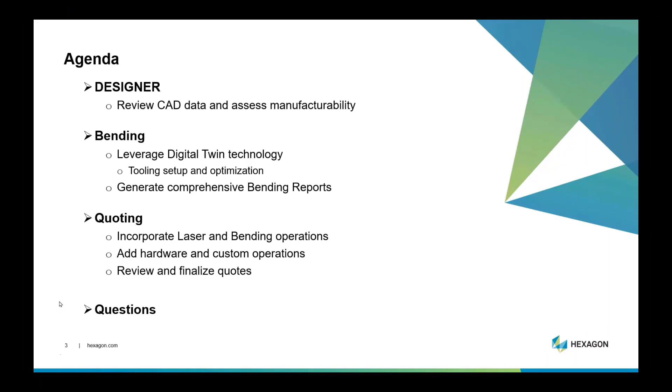And then last, we'll go through quoting. We'll add some operations such as laser, bending, hardware, or any custom operations. We'll review the quotes, and then we'll go through some questions. Okay, you guys ready for this? What I'll do is I'll turn off the camera now, and we can just go through and kind of see where we would start. So we would start with Designer, right?

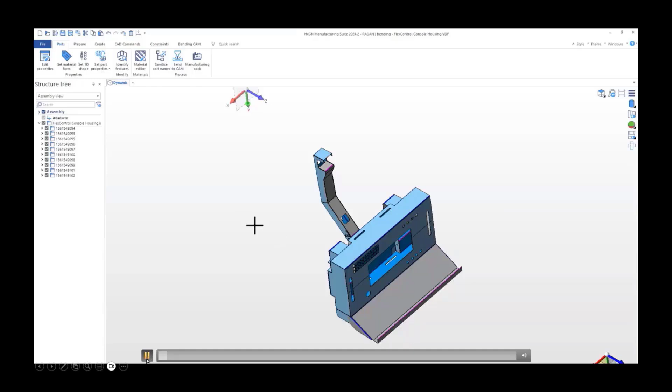Again, in Designer, we would verify. My first question is, we would import CAD data, right? So this CAD data can come from SolidWorks, Inventor, any 3D format. Okay, you can use SolidWorks or Inventor to look at CAD data, but in my case, I'm going to use Designer. I'm going to get my eyes on this CAD data, right? I'm questioning, are these parts manufacturable? So maybe I'll go through the assembly, look at the individual parts, kind of question if there's any issues like this part here, right out of the gates.

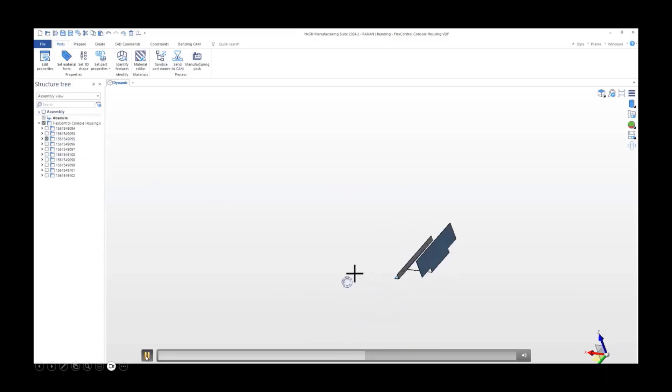That looks to be an interesting part, right? So can I manufacture this part? Maybe I'll circle back to that part later. And then I'll keep going through and just get my eyes on the CAD data. Technically, we can bring in the 3D model directly into the quoting module and start quoting, but personally, I want to get eyes on this first. So I go through the different parts. Some of these parts look fairly easy to manufacture, so no issues there.

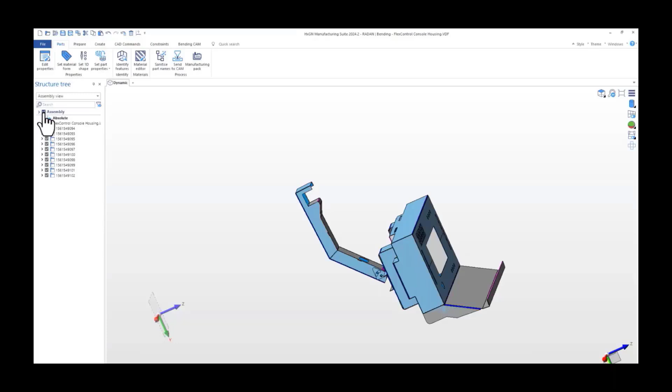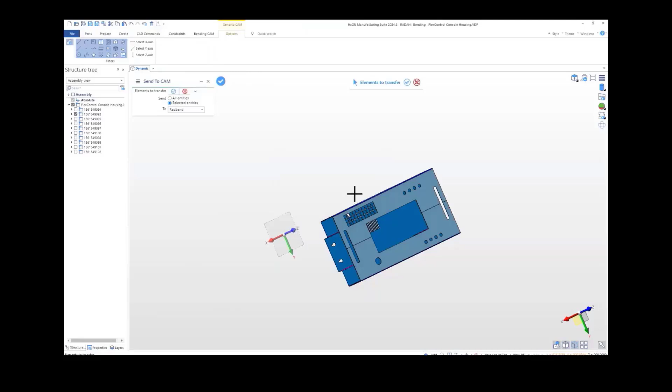Okay, so once I bring the CAD data in, I'm going to circle back to this part here, right? So once we bring in the CAD data, I want to question whether that part can be bent or not, right? One of those parts was in question, so I can come in here and isolate that part. And then I'd pass it over to Radbend, which is our digital twin for our specific machine, right? So we would have the ability to come in here and say, all right, how would we process this part? So the software would help you with a bend sequence, would help you with a flat pattern.

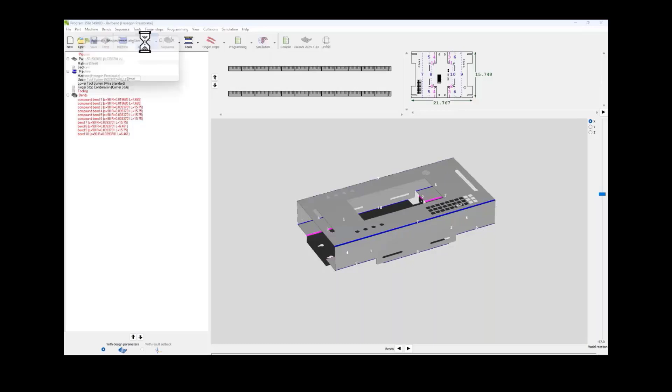You would then select your machine, your digital twin. You can have any machine regardless of the manufacturer. And then we would ask the software to scan through our tool library and determine whether we have the right tools for this part. It comes up with a tool setup. And then we can sequence through the bends, right? So we can verify, hey, am I going to have a collision or not? Do I have the right tooling? Do I have the right sequence, right?

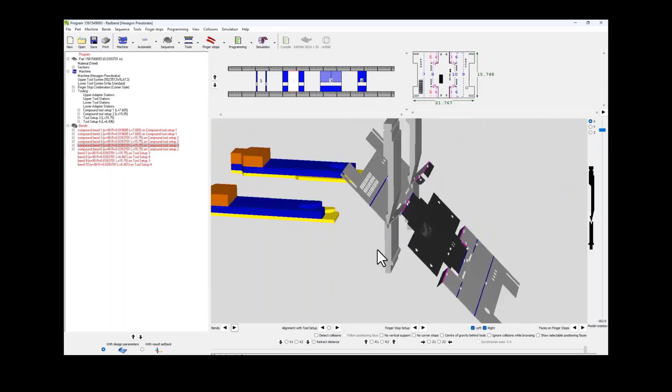Historically, traditionally, the quoter's going back to the shop floor and asking them. We eliminate that step here by using the digital twin and verifying that, hey, I can process this part.

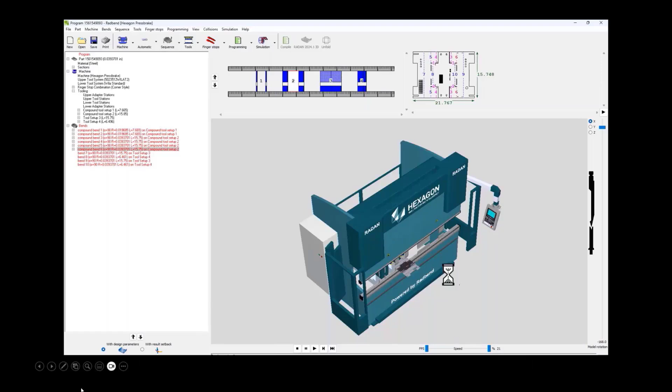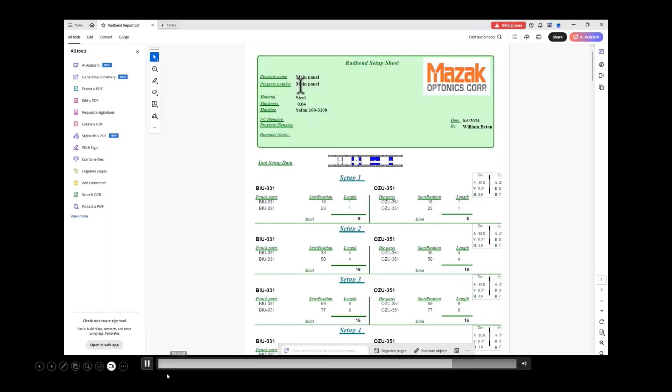I go through a full simulation process. It would allow me to see any collisions with the RAM, with the tooling, with the finger stop, any portion of the machine. I can go as far as sending code to the press brake and being able to program the machine offline, or just verifying that I have the right tooling so I can commit to quoting this. We can go out and send a setup report.

That setup report would contain the tools needed for the press brake for this specific part, segmentation, where to locate the tools, and then the bend sequence. So pretty straightforward there, right?

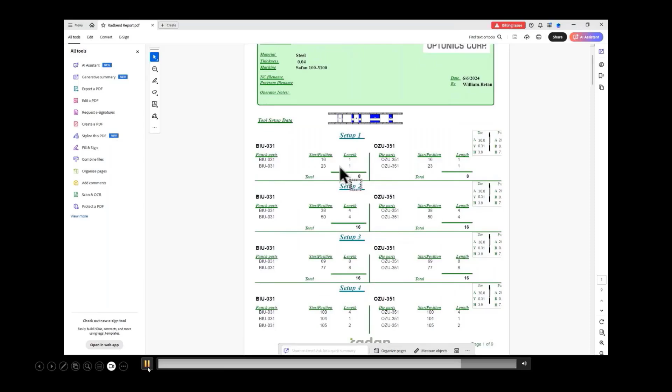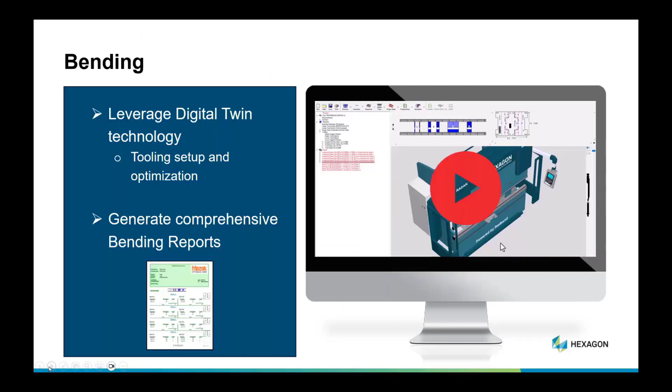Now that I've confirmed that I can process this part, I can go ahead and maybe at this point, commit and start quoting, right? I want to start my quotation.

So the next step here is, once I got eyes on it, I realize, hey, I can process this part. I can send all my parts over to the quoting module.

Now notice, Designer allows you to integrate all Radan products together, right? So Designer brings in, you can bring in your geometry into Designer, you can send it to bending, you can send it to quoting or nesting, whichever operation that you want to do. You can use your OEM CAD package like SolidWorks or Inventor, but in this case, like I said, I'm using Designer. It flows very simple and easy.

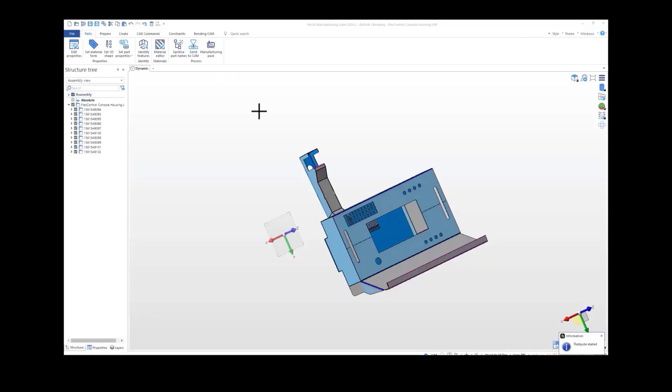So at this point, I'm going to say, hey, I'm ready to put a proposal together. So first question would be, do you want to start a new quotation, or do you want to add this to a previous quote? Who is this quote for?

All right. And then what we would do here is we'd bring in the geometry right at the top, right? You got the customer, the markup for the customer, total sales price. When we calculate, we can add attachments, okay?

We can import 2D CAD, 3D models, DXF, DWGs. We can do a manual part, okay? We can also do purchase components such as hardware, which we'll do some of that in this quotation here. We'll do tubes and bars, any safe parts, common parts that we typically quote.

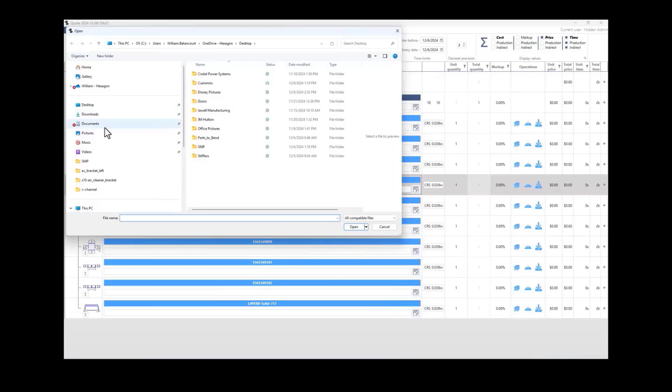Okay, so it'll bring in all the parts to that assembly, unfold them. We can also potentially change the thumbnail of the assembly, right? So a nice image of the assembly, so that when we prepare a quote document, we can go ahead and show what that full assembly looks like.

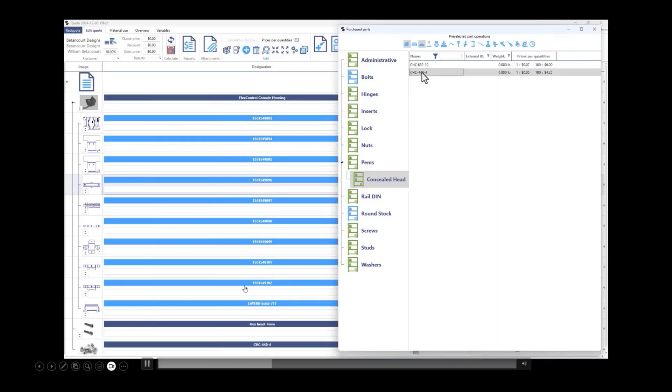So here we have the assembly, all the individual parts. What I'll do next is I'll add some hardware, okay? So maybe some PEM nuts, some nuts and bolts.

If the assembly had the hardware in the CAD data, we wouldn't have to do this, but in this case, it wasn't there, right? So very easily, we can come in here, add some purchase components, add some operations, such as riveting or additional assembly time to that piece of hardware.

We can go through and answer some of these questions. So notice on your right-hand side, you got material, laser, and bending operation. You can customize the amount of operations that are in here, right?

Fully customizable operations. In this case, if you look here, you'll see that for the assembly, I have welding, painting, spot welding, riveting. Out of the box, you will get a group of operations, but you can add custom operations and you can customize the out-of-box operations.

For instance, here, we'll go ahead and add some welding. Here's the welding operation. I wish I could stop this a little bit because there's so much good information here. So you can select which type of welding you want to do.

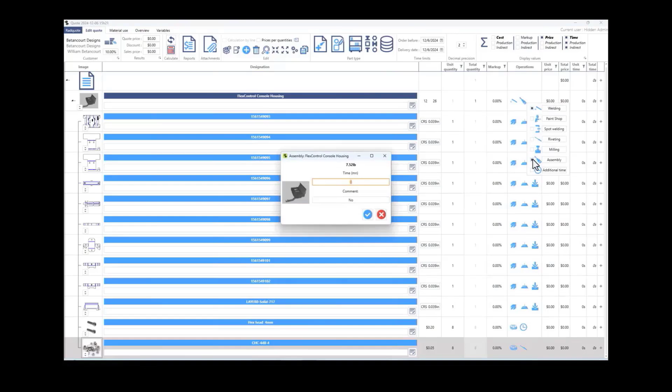We're going to add assembly to it as well, right? We can add the time. We can change the quantities here.

While it's doing a calculation again, it's basically nesting all the parts in the background, coming back with a cost for the assembly operations, okay?

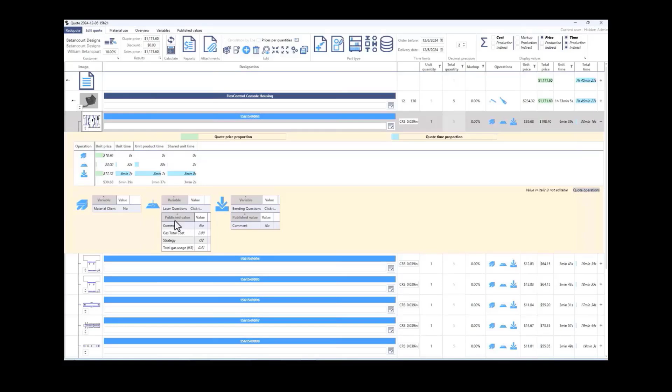And then you can drill down to the part as well. The individual parts would have each operation. So you got your material, your laser, your bending, specific to the part. And then at the quote level, you would have all the operations for the assembly. And then you also have the ability to change potentially like pricing for this.

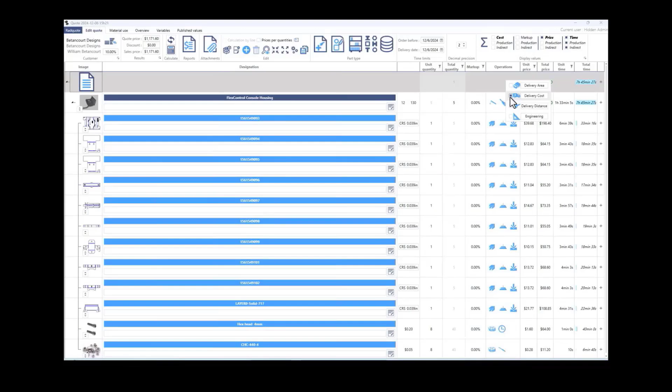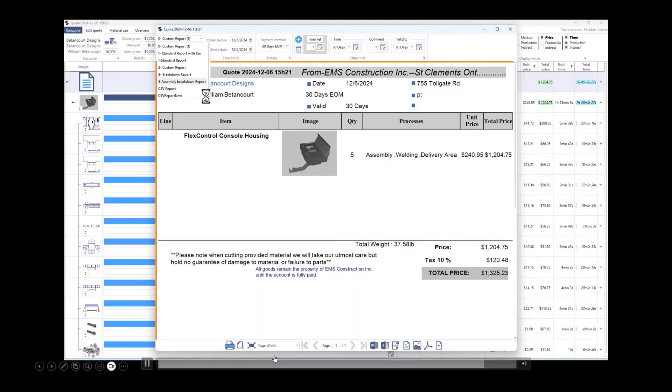The cost of material - you can add delivery costs. It can be based on the weight of the assembly, because we know the weight from the CAD data. Or in this case, I'm going to do an area delivery, which would basically be a radius. So area delivery A, we'd call it 15 miles, 10-mile radius, and then you'd get a nice quotation.

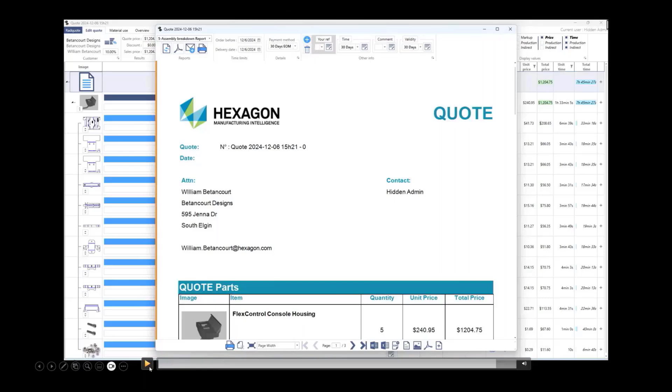Fully customizable quotes - you can email the quotation directly from here to your customer. You can have a reference, maybe a due date, comment, validity, and form of payment. Again, fully customizable quotes. If you look down here, you can see all the parts, total cost, and you can add additional comments to the proposal as well.

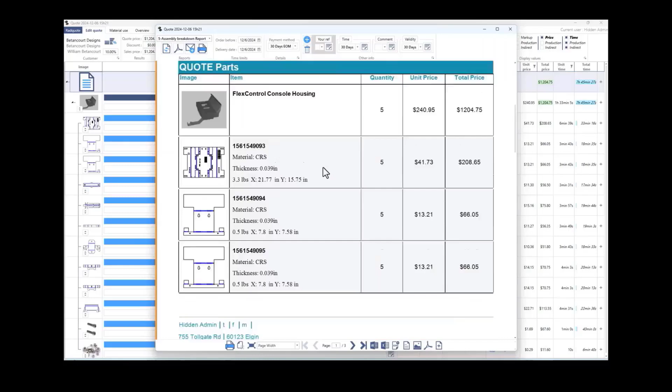Here's the assembly, here's all the parts, here's the hardware. As I mentioned before, there are additional operations we can add to the assembly.

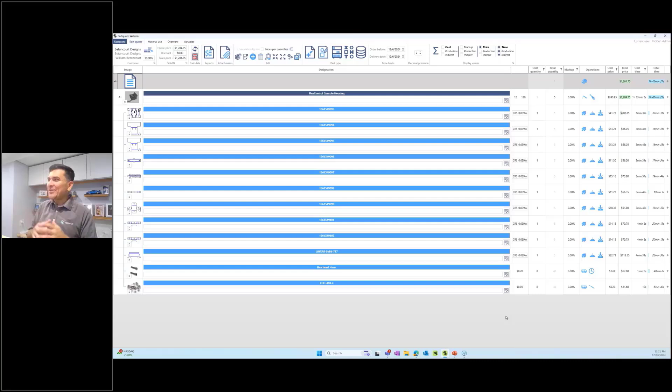I think it's a good time to ask for any questions. Yeah, we actually have some questions, William. This is pretty good, awesome, great. I wish this was a little bit more interactive, but this will work. What kind of questions do we have, Michael? The first question, let's go with that.

Can you add grain restriction to the parts? Yes, we can - excellent question. Let's do this, I'm going to stop sharing my webcam here for a second so it doesn't lag. So if we look at material, the way we quoted it, we selected a grain of 'any'. You can specify if these are stainless steel parts, brush finish, they've got to go a certain direction. You can specify exactly how to orientate this part, how to restrict that.

Yeah, excellent, any other questions? That was a good question there. Yeah, actually we do - the next question, how is the sheet utilization calculated?

Okay, so sheet utilization - again here we can do a number of things. Keep in mind, our quoting engine is connected to our nesting engine, right? So that's a good thing because here we can specify: do we just want X and Y bounding of the part for material utilization?

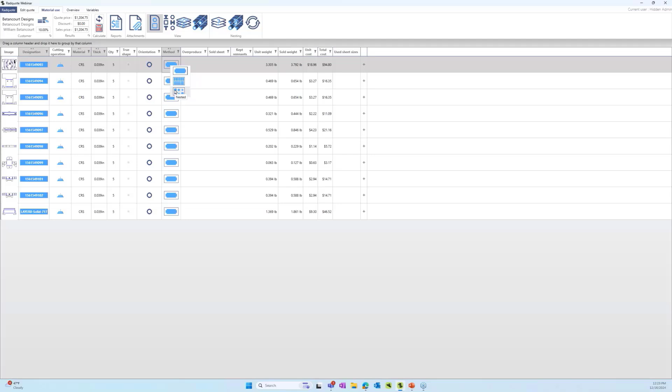That's option one. Option two would be, let's go ahead and nest part A onto one sheet, divide the cost of the sheet by the number of parts - we call that single part nesting. The last option would be dynamic nesting: grouping all these parts, material types, and thicknesses together and saying, tell me how many sheets I need when I group these together. Most of our customers will quote using X and Y bounding of the part, or single part nesting in this case, but when you're in a more competitive situation, maybe dynamic nesting.

But is painting an available operation? So absolutely, custom operations are available. Painting is an operation out of the box. And for painting here, we can come in and just add the painting operations, for instance here.

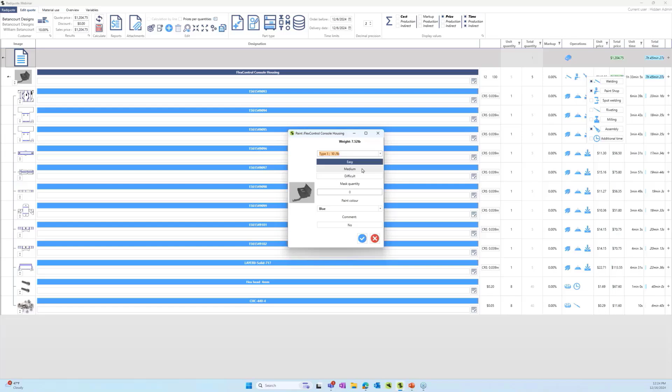So we can come in and say, hey, I want to do painting. It would ask me a couple of questions - those questions are fully customizable, but these come out of the box. The way this would work is: what kind of painting are you doing, maybe 1 layer or 2 layers? Is it easy, medium, or difficult? And what color paint? So I'm just going to go blue - we're going to paint this whole assembly blue. And then I can go ahead and calculate this.

So for painting, what the software does is use the surface area of the part times your painting formula. It'll go through, calculate the surface area for each part, multiply it times your painting formula, then add all that together, and it gives you a total painting cost for the assembly. Okay, so there it is.

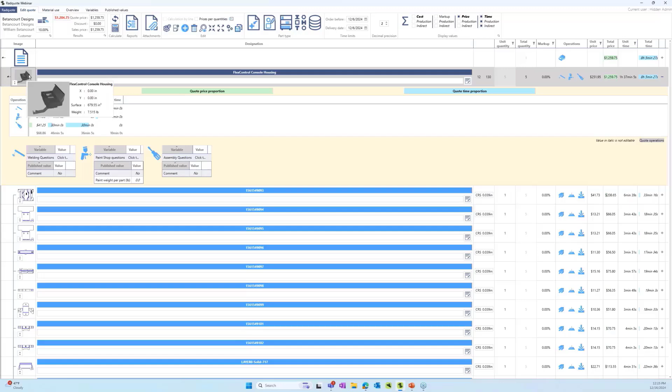And then we can drill down to the painting operation. Again, these variables here - the cost is not as accurate as you would want, in the sense that they're dummy numbers. So my hourly rate may be $5 an hour versus you guys would be $200 an hour, $50 an hour. So what I can do here is go ahead and save this.

And I would save it, and I can issue the quotation or save it as a draft. I can say, I'm going to issue this, and please remind me to follow up with the customer on the 20th of December. Do I want to delete the original draft? Maybe I don't want to, or maybe I do. Why wouldn't you want to delete it? Maybe you want to leave both options open for the customer. That way, if he decides he does or doesn't want to paint it, you still have that quotation available.

A couple more questions, William, and then we'll let you off the hook. Are there any metrics that you can review at the end of the year, based on the quotes?

Yeah, we got some metrics we can review. There's a couple different metrics. Let's start with reminders. For instance, you can look up all the reminders, any quotes that you have to follow up on, from a minimum date to a maximum date. So any quotations you want to follow up on will list right in here.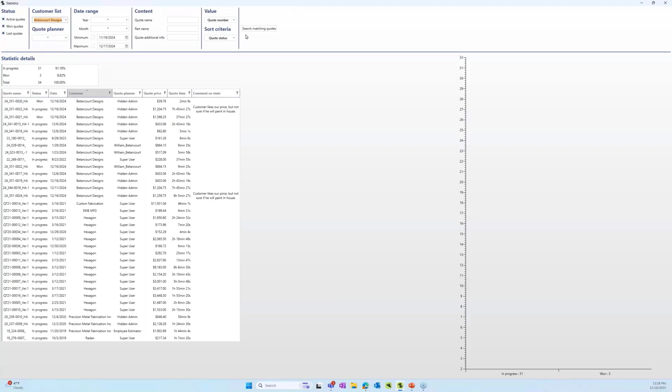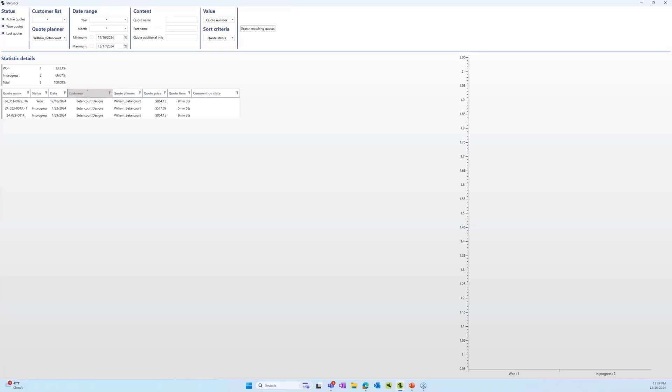Maybe you want to search by the employee, to get some metrics on a specific employee. You can see that William Betancourt has quoted three quotes and has won one quote.

Last question, actually. Can you connect to an MRP or ERP system? Great question, so absolutely. We can do one of two things. One way, the answer is yes, and what we would do is when the quote is won, we can at that point feed the ERP system and turn this into a sales order. We would handle all that integration ourselves.

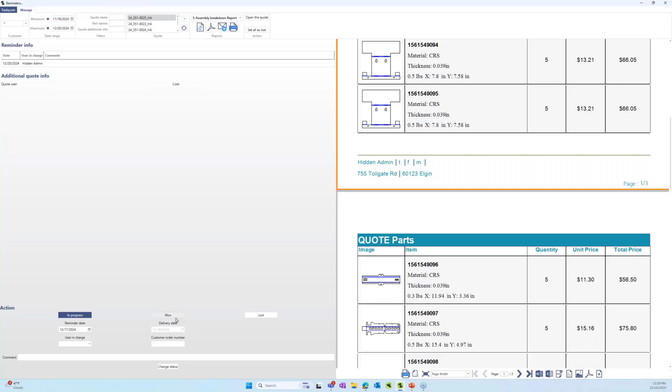The second option would be that we export this quotation in the format of potentially a CSV file, and then internally you would do the integration between your ERP system and us, by exporting that CSV file, which would contain the name of the parts and all the operations.